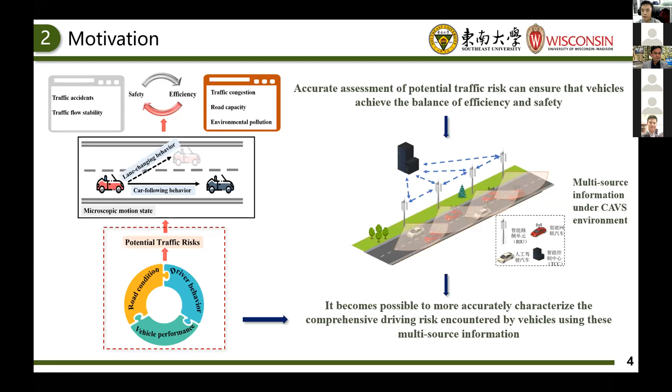As for the motivation of this work, accurate risk assessment can not only greatly reduce the occurrence of accidents, but also improve the efficiency of road traffic. In recent years, connected and automated vehicle systems have achieved unprecedented development. Under the CAVs environment, vehicles can receive much information about the road and other traffic subjects, such as the motion information of surrounding vehicles, the location of people at intersections, and even the traffic light ahead. So it becomes possible to more accurately characterize the comprehensive driving risk encountered by vehicles using this multi-source information.

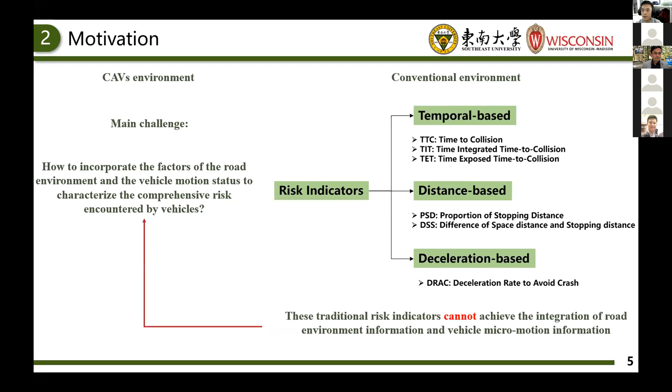Therefore, under the CAVs environment, the main challenge is how to incorporate the factors of the road environment and the vehicle motion states to characterize the comprehensive risk encountered by vehicles. Road potential risk assessment can be achieved by formulating traffic risk indicators, such as the traditional indicators TTC, PSD, or TIT. However, those traditional indicators cannot integrate road environment information and the vehicle's microscopic motion information, so they cannot meet the requirements of more accurate driving risk assessment in the CAVs environment.

In recent years, a novel research method of driving safety was proposed. Their findings show that the method combined with field theory in physics can well describe the driving risk constituted by various factors in the traffic system and can be used to evaluate potential driving risk in actual traffic situations. However, the safety potential field model they established cannot dynamically feed back changes in the potential field distribution caused by changes in vehicle movements, due to the lack of consideration of the vehicle's acceleration parameters. Therefore, the plan of my research is to develop an improved potential field model and propose a novel potential driving risk indicator to better evaluate the comprehensive driving risk under the CAVs environment.

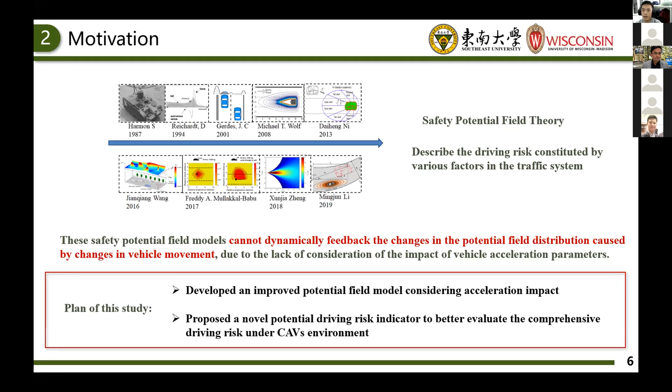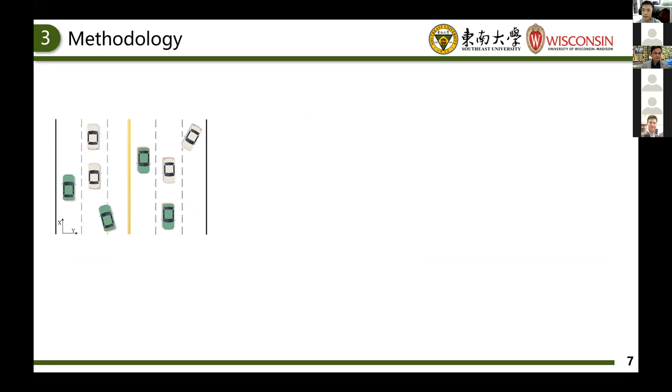The road traffic environment is composed of people, vehicles, road environment, and other traffic infrastructure. The safety potential field in this simple road environment can be divided into three categories: the lane marking potential field, the road boundary potential field, and the vehicle potential field. So the total road safety potential field is a superposition of many traffic elements' safety potential fields. The first task is to model each type of them, and those three kinds of potential field will be discussed in a few minutes.

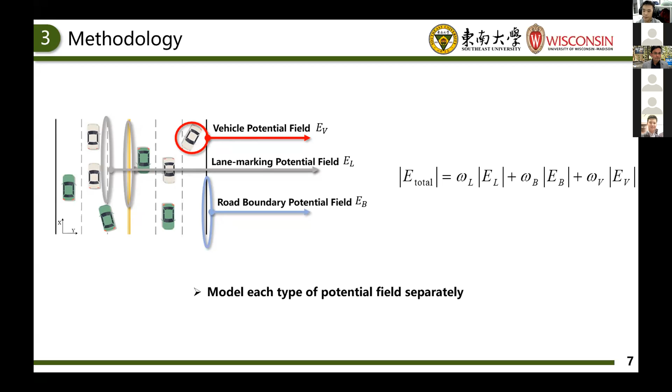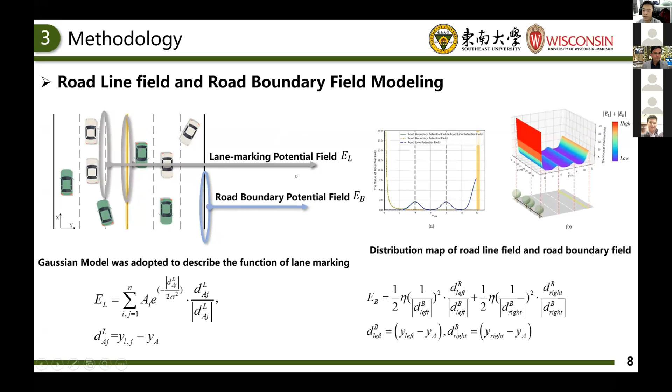From this picture, we can describe the distribution map of the lane line field and the road boundary field. The potential field intensity is the lowest in the middle of the road and the middle of the lane and reaches the maximum at the road boundaries. That is, those two kinds of potential field require the vehicle to remain as much as possible in the middle of the lane.

The vehicle potential field comes from the vehicle driving on the road. The intensity of the potential field formed by one object vehicle is determined by its attributes, such as vehicle type and mass, and its motion state, the velocity or acceleration. Under the CAVs environment, vehicles can receive micro motion information of other vehicles. So in our work, we improved the traditional vehicle potential field by integrating acceleration and the steering angle in the modeling process. Our model considers the impact of the acceleration of the preceding vehicles on the following vehicles, so we can make more precise control decisions on the motion behavior of the following vehicles.

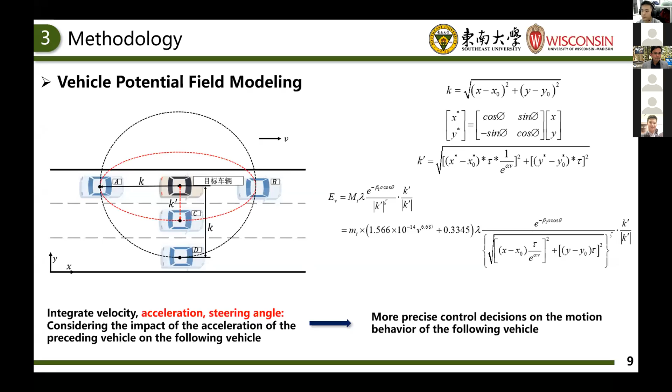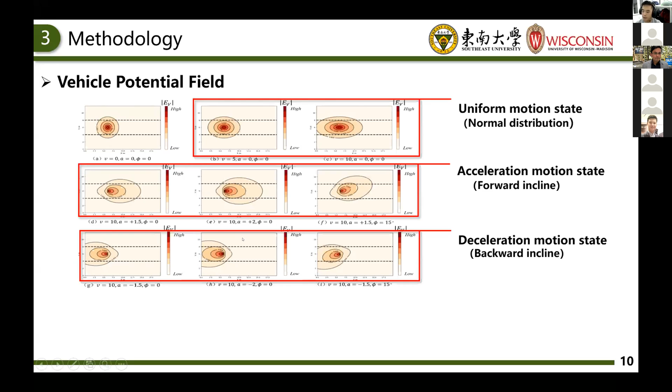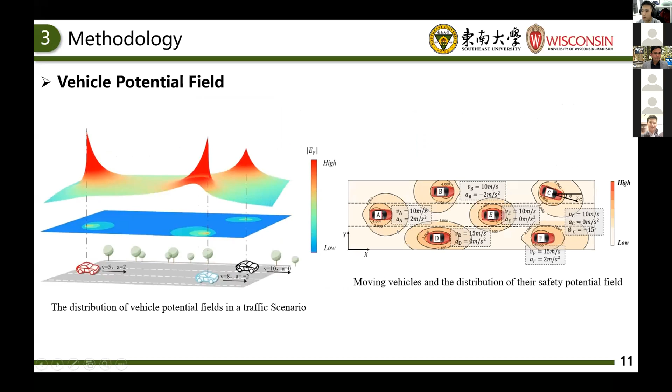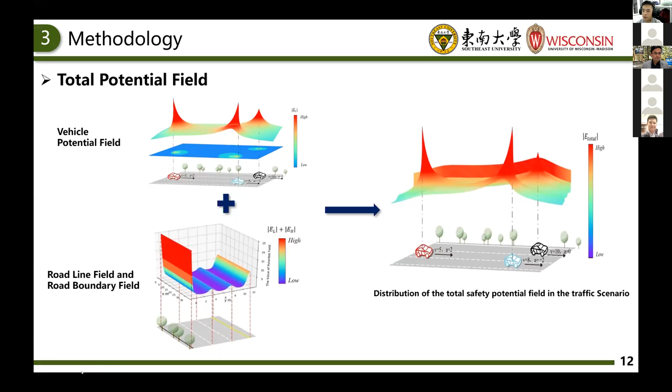And this figure describes the potential field intensity distribution of a real-world scenario with several moving vehicles with different motion states. If you can recall, the total potential field of the driving environment is composed of the road line field, the road boundary field, and the vehicle field. So the distribution of the total safety potential field can be obtained by the sum of those three kinds of potential fields.

After the modeling of the safety potential field of different objects in the road environment, the traffic risk indicator can be constructed. The field force generated by the road boundary potential field or the line marking potential field restricts the movement of the vehicle according to its road geometry. It's a vector, which means it can be longitudinally opposite. That is, it doesn't satisfy superposition. So it cannot express the comprehensive and superimposed risk of the vehicles in a complex traffic environment.

Therefore, when characterizing the comprehensive potential field formed by multiple objects on the vehicle, a scalar indicator is required to describe the global driving risk. So we use the potential energy to construct the indicator. Because this parameter is scalar, it can reflect the total risk of the road environment and conform to the superposition principle. It can not only reflect the traffic safety risk from surrounding vehicles, but also integrate the risk of the road environment.

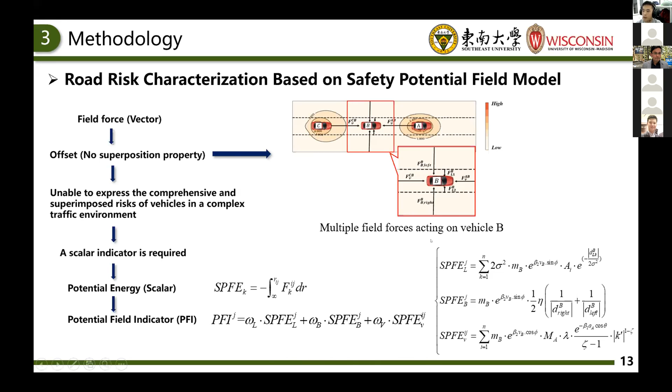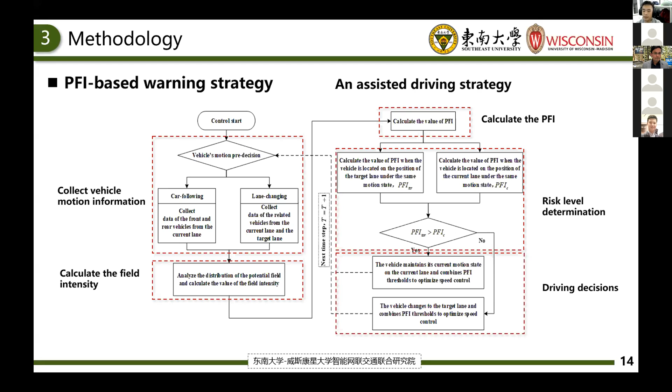And based on the risk indicator PFI, a warning strategy is proposed to warn the vehicle of the risk level of its current motion state. It's an assisted driving strategy. First, the motion information of the object vehicle and its surrounding vehicles will be collected to determine its current motion state. Then the distribution of the potential field and the value of the field intensity are calculated to obtain the PFI. Based on the PFI indicator, the risk level of the vehicle can be determined, and the output is the motion decision and the driving speed.

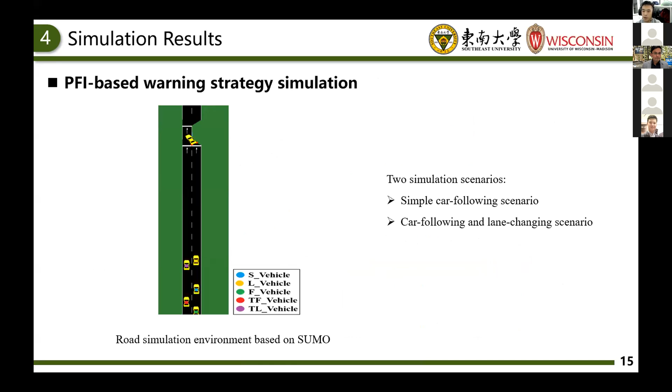To demonstrate the feasibility of the PFI-based warning strategy proposed in this study, the SUMO microscopic traffic flow simulation program was adopted. Two simulations were conducted. One is a simple car following scenario, and the other is a more complex driving scenario that includes car following and lane changing. In simulation one, a simple car following scenario was simulated. The leading vehicle applies sudden braking, and the possible behavior of the following vehicle is shown.

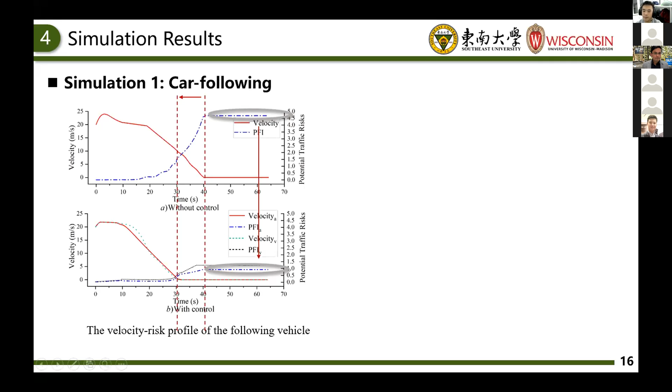However, the simulation result indicates that the TTC which considers acceleration often shows discontinuity during the simulation process, so it cannot be applied in driving risk assessment to guarantee the absolute safety of the vehicle under the connected and automated driving environment. Moreover, compared with the TTC indicator which considers velocity and SM, the PFI we proposed can better characterize the actual risk of car following.

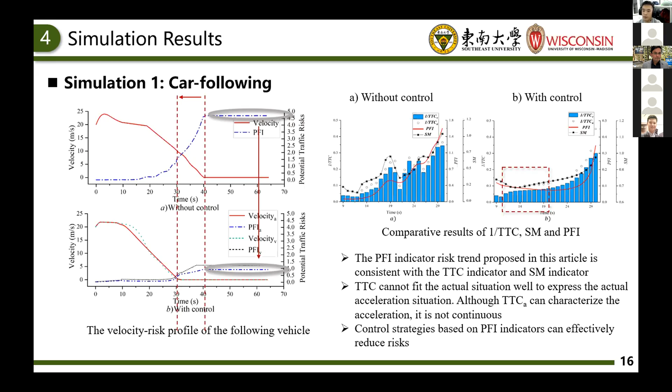For example, between 10 seconds and 20 seconds, the car following scenario is in a state where the leading vehicle is decelerating and the following vehicle is also decelerating. In fact, the following vehicle right now is very safe; that is, the risk it faces is very low. However, both TTC and SM display increasing states at this time, which is different from the actual situation. To further demonstrate the benefit of the proposed indicator in this study, several other simple car following scenarios are simulated.

We can see from the figure that the traditional safety indicators based on the TTC cannot characterize the change in safety risk of vehicles in different motion states. On the contrary, the PFI proposed in this paper can show the difference in the driving risk faced by the following vehicles in different scenarios. This is the benefit from our proposed indicators.

For example, in the actual driving process, the driving risk faced by the following vehicle under those three kinds of situations should have certain differences. It is not difficult to find that the TTC cannot distinguish the difference in these three cases.

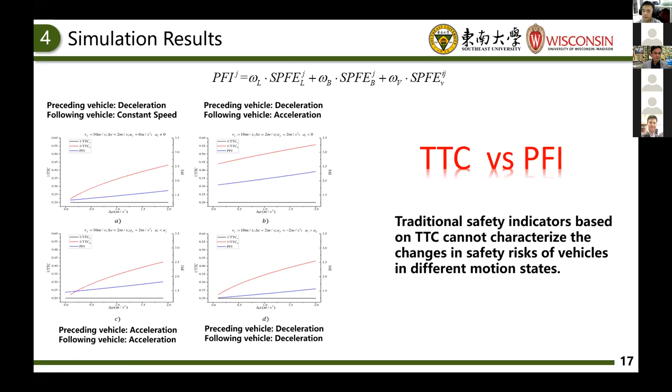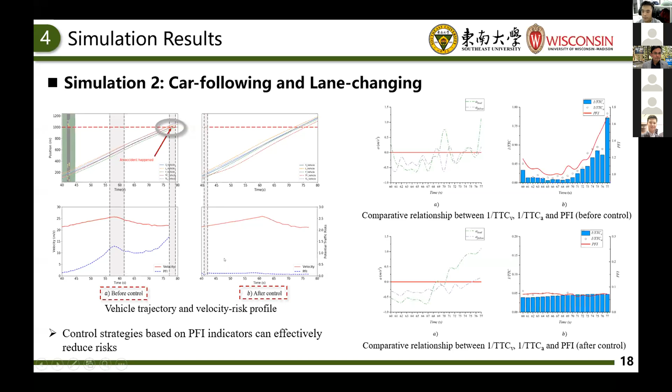Okay, after the work concluded in this study, some interesting conclusions can be drawn. First, the improved safety potential field model can dynamically characterize the spatial distribution of safety risk around the vehicle under different motion states, and compared with the traditional risk indicators, the potential field indicator proposed in this study can better evaluate the traffic risk in the CAVs environment. Finally, the control stage based on the PFI indicators proposed in this study can effectively reduce risks.

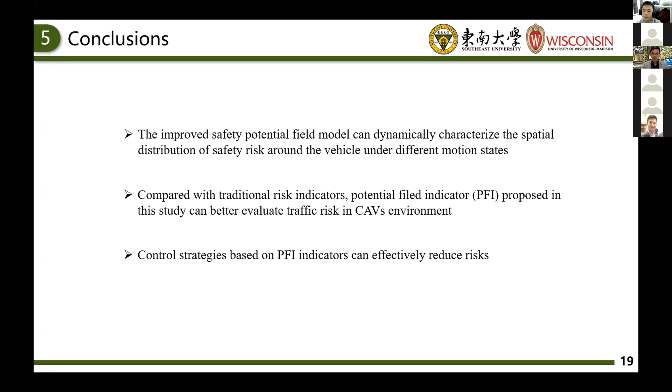So while we wait for some questions from the audience, I have a question for you. That's a very good sound theory that you are working on in terms of developing the safety field for various interacting objects in a road traffic environment, including the moving objects plus the static objects like road boundaries. So that's good. My question is, what's next? What are you thinking of to apply this theory? What are the applications or extensions of the research you are thinking along this line?

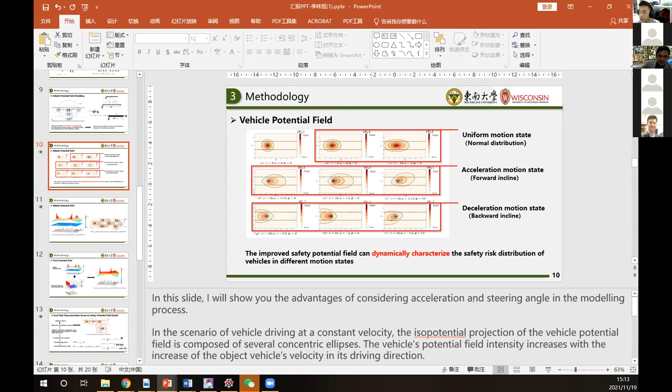The very important thing in this paper, I think, is that I construct the vehicle potential field, and by using this field, we can see different features of the vehicle motion state. For example, when the vehicle is under a constant velocity, its distribution is different from the vehicle in the acceleration state or the deceleration state. So the improved safety potential field can dynamically characterize the safety risk distribution of the vehicles according to its different motion states. Okay, that's good.

And another follow-up question that I would have: if we apply your theory to a mixed traffic situation, let's say traffic mixed with connected and automated vehicles plus traditional vehicles, do you think the safety field will be different for CAVs versus the normal vehicles?

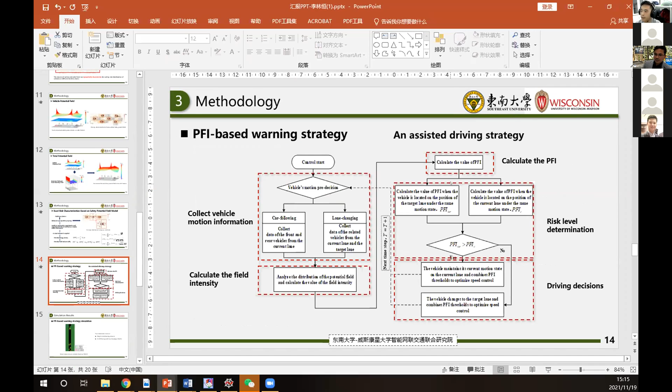I think it's a good question, and I think my method can, because in the CAVs environment, the vehicle can receive much information by V2V or V2I. So much information will be collected by the vehicles. So how to use that multiple information is a key point in my research. So I use the safety potential field theory to collect all that information together and make the distribution map with its different motion states.

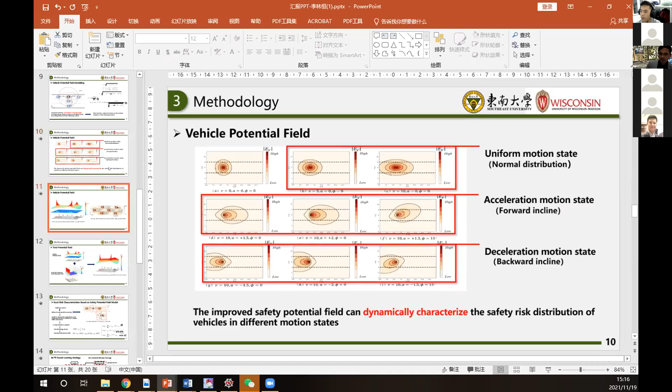Okay, I know these questions. Before this paper, we already had another paper about a car following scenario using the potential field to construct a car following model. And in that paper, we used the NGSIM data to calibrate many parameters. So if you are interested, you can follow that paper.